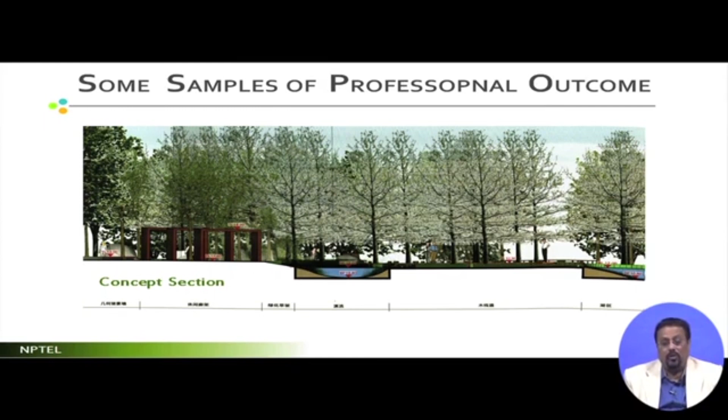This is a representation of a concept section. In this, the section has been drawn like a technical drawing. This is the section line, drawn with all those pits and mounds, embankments and the water body, and the rest of the things are images of trees and others. This also gives clarity in the mind of the viewer. That means the owner, when he sees your section, also gets it very clearly.

Then comes the concept elevation. Look at this. Here the landscaping is a part of the building elements, and you just try to show trees and all. These are all representative. This may not be exactly the kind of tree that you are going to have. Trees will have different shapes, and it is best if you can emulate what kind of tree is going to come and what its profile is. But this is how the concept elevation looks. These are semi-technical drawings, and they are dimensional. They are not arbitrary. Everything is dimensional.

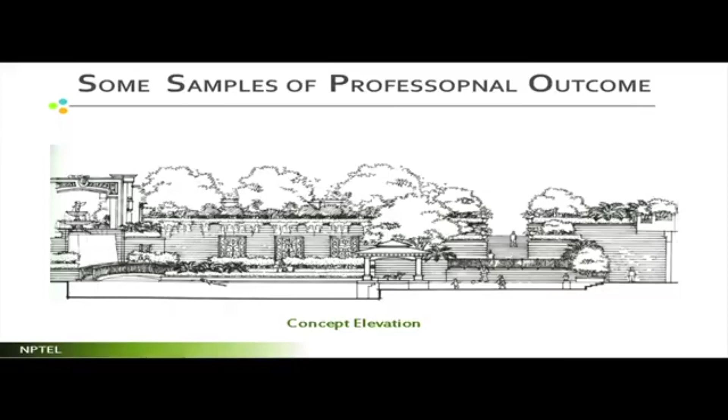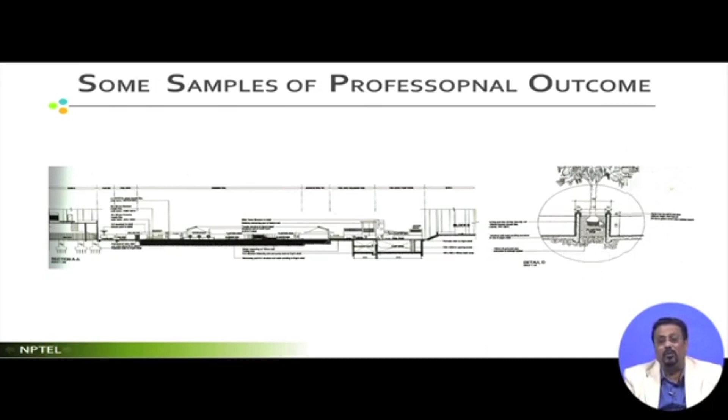And then another one: this is a section in which you will find every element annotated, shown with the building elements, how the tree is going to be planted there, how the planter box is going to be. All these are a part of it. So this is a technical section. Now see another technical section. Look at this drawing.

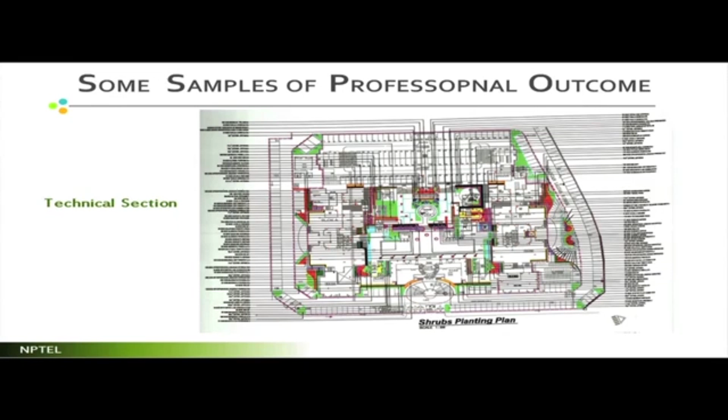Looks very cluttered, very clumsy. Now this particular technical drawing has a lot of annotations. Mind it, these annotations are very meaningful, very useful. Don't bother about the quality of the drawing if it is totally cluttered, because each and every element, unless told, you won't be able to visualize. So this particular drawing is a very technical drawing in terms of plan.

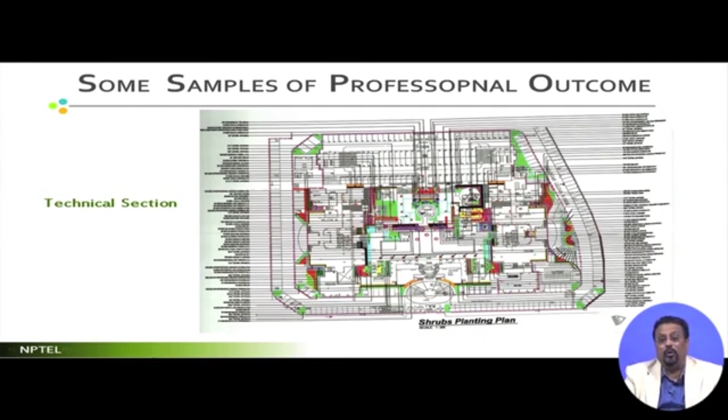So I have shown you one plan earlier where there were no annotations. I am showing another plan where there are annotations. Don't bother about the clutter of this. What is most important is how many communicated elements are there. That means people know exactly what you are giving.

Now here I am going to show you a few of my own project works. Okay. Now this is one of the township landscape plans which I have prepared for Vindhyachal NTPC township. Now this is the kind of drawing. If you really look at the drawing, it looks very cluttered and looks like any other construction drawing, and that is important. Every location of the buildings is there, and then the trees are also located, not to detail. In fact, this is the broad layout plan, for showing the plantation in all those areas. It has generated nearly 30 drawings to show the plantations in all other places.

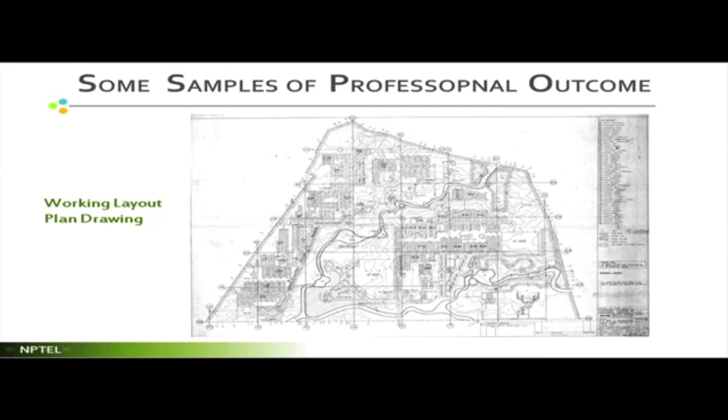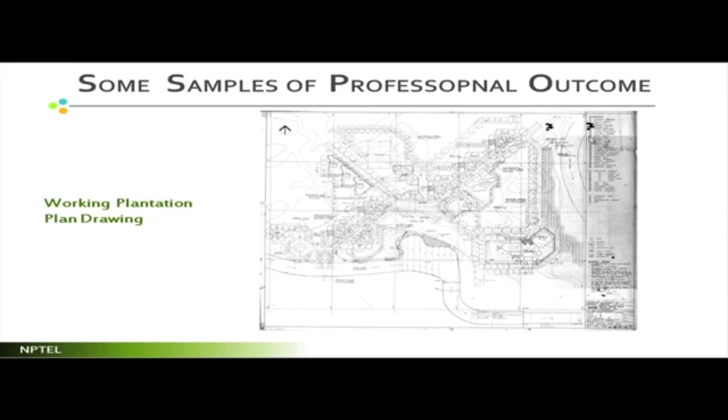Now this is another one in the same project, in the same Vindhyachal NTPC's domain. It is a residential complex. Look at the drawing, if you can make out that there are plantations here, there are houses here, there are roads, there are grids giving dimensions, and everything is dimensioned. This is how the working drawing or construction drawing is. It must have all the trees' names and numbering here and the dimensions, so that there is no mistake in creating this. I will show you another one.

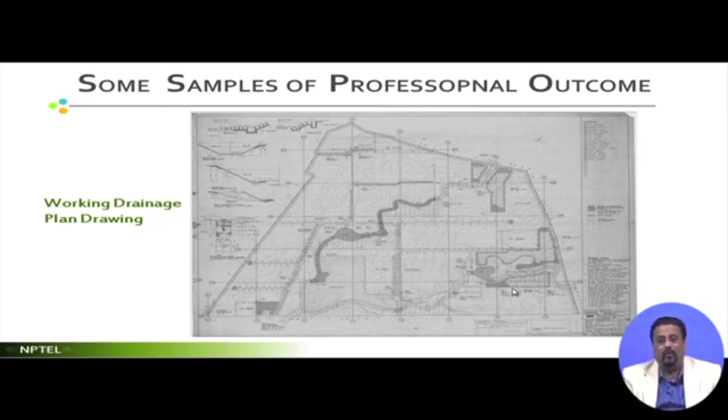Look at this. Let me show you one more in detail. Yeah, this particular drawing, of the same township, shows only the canal location, absolutely with dimensions and some idea of the plantations. And this is another detailed plantation drawing, and this is the embankments. The canals are there, the canal embankments.

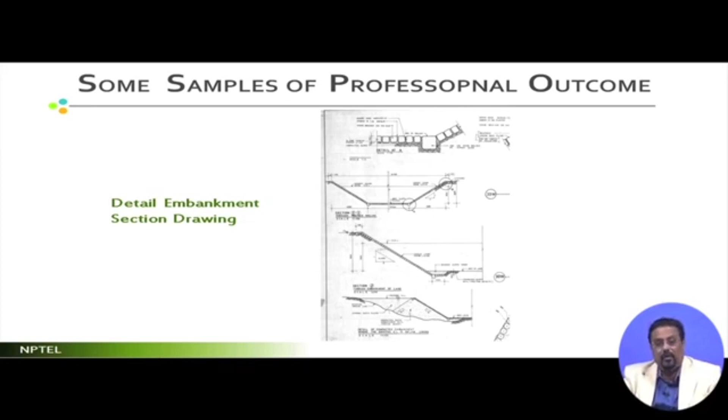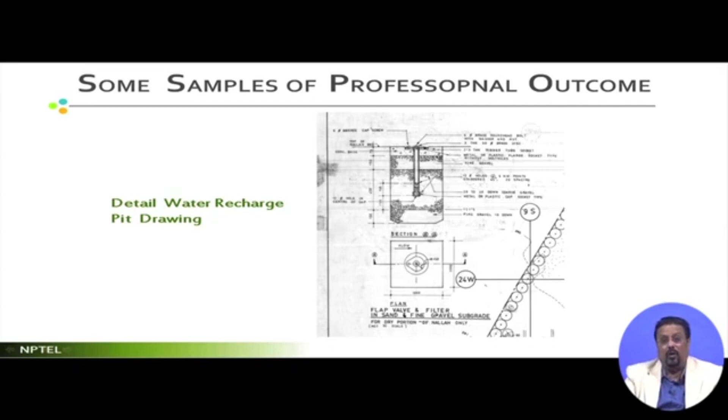That means these working drawings are as good as, rather the same as, any other engineering drawings. So never consider that your landscape plan is nothing but a colorful pattern making game. No. One more. Look at this. It is a recharge pit, on the canal, in the bed. I will discuss this when I talk about the drainage plan later: there are recharge pits where, in case there is an excess of water, it should be allowed to go in, or in case there is groundwater here, it should be allowed to come up. So that is the recharge pit we have.

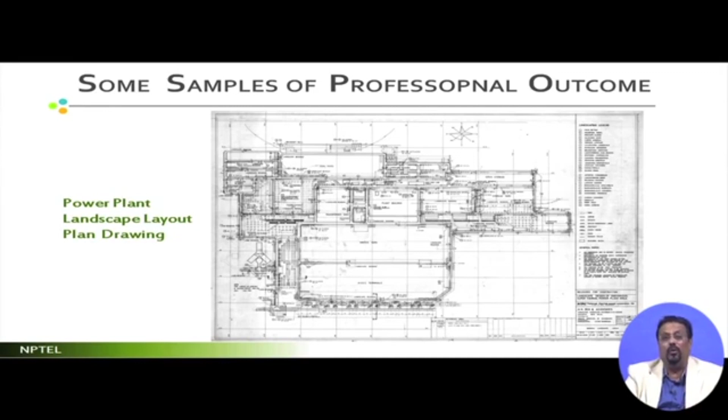And look at this one. This is the NTPC Vindhyachal power plant. It has nearly 15 drawings to indicate the total landscape plans. I am just showing you one layout plan in which everything is shown, the mounds, the plants, and a few other aspects. The sections, the landscape sections, which have the mound size, slopes, location of plants, their positions.

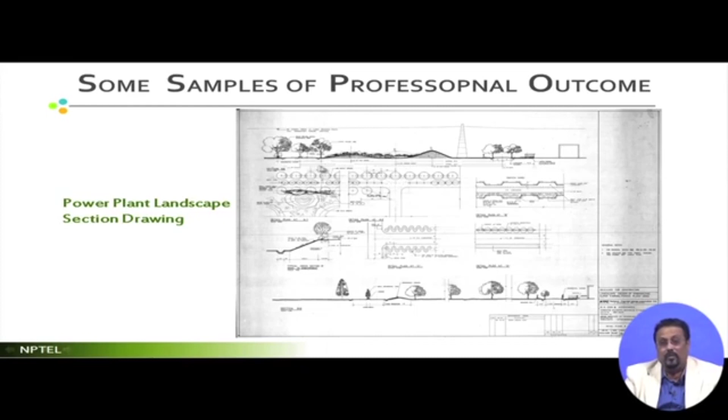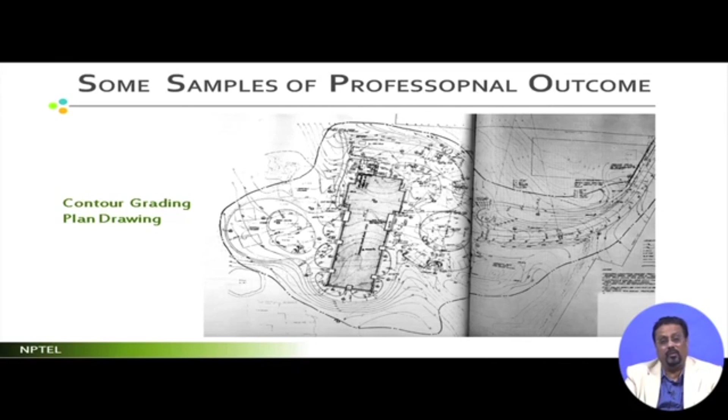I am just showing you one representative plan for contour evaluation. Suppose the landscaping is being done around this particular building, the contour has been evaluated, the contour has been graded. So it is a contour grading plan. So basically your construction drawing will have multiple such things.

So, the ultimate outcome, whenever you are planning, can range from large housing areas to clubs and country homes. It can be to the level of parks, greens, urban greens, small extension housing area greens, and even to the interior. So, altogether, if you follow the same items as I said for the scope of work, you will find that this will be very ideal.

So, here what we have learned is all about the categories of landscapes to the scope of work, and what lies ahead is the history. We will be discussing in the next set of lectures the history of architecture.